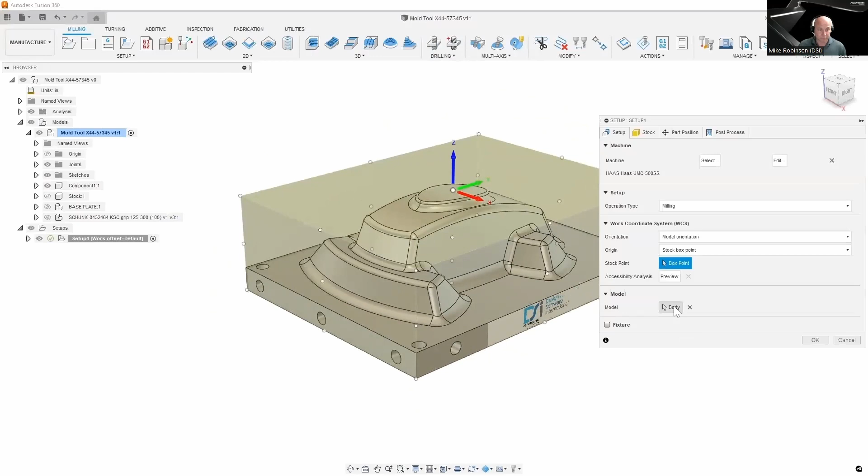Hopping into Fusion 360, we'll start off with this mold part. Essentially what we're going to do is hop from design to manufacture and look at how some of the features inside of the machining extension can help us with processing a part like this. First thing I'm going to do is go to setup. I'm going to start creating my setup. You can see that Fusion selected the body for me already.

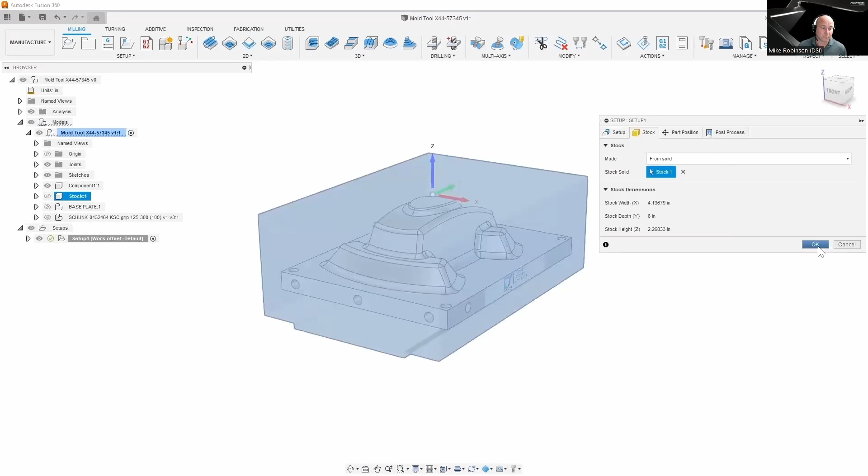I do have a machine selected here, UMC 500. And I'm going to add some of my fixtures here. And then I actually have a custom stock for this. So we'll set this as a solid and I'm going to grab my stock and that looks pretty good. And we're going to hit OK and our setup is created. So from there, I'm going to start machining this part. And the first thing I want to do is rough this out.

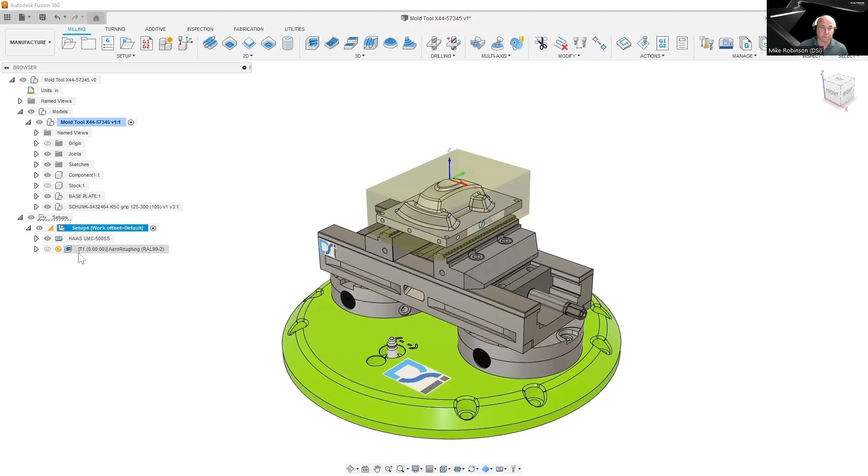Now this is something I do fairly often. So I'm going to right click on the setup here and say create from template. And I have this AeroRoughing template. It's going to drop that template in here and I can right click on this and just hit generate. That's going to go through and rough that out for me. And we can right click on this and simulate it because I'm imagining I'd probably want a little bit more definition. We can hit play on this.

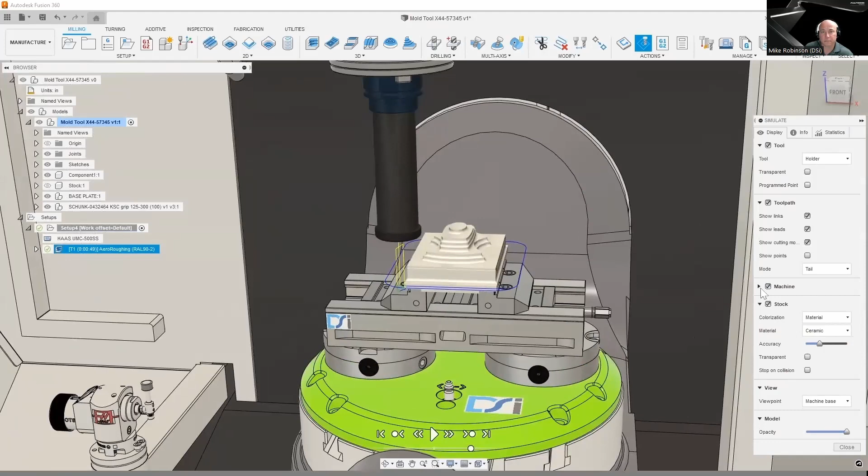We can see this going through. And that looks pretty good. We can turn this to transparent here to see there's a little bit extra material on there that I probably want to get with a rest machining operation. So I'm going to take this and duplicate it. And I'm going to go into the second version of the toolpath and change the tool.

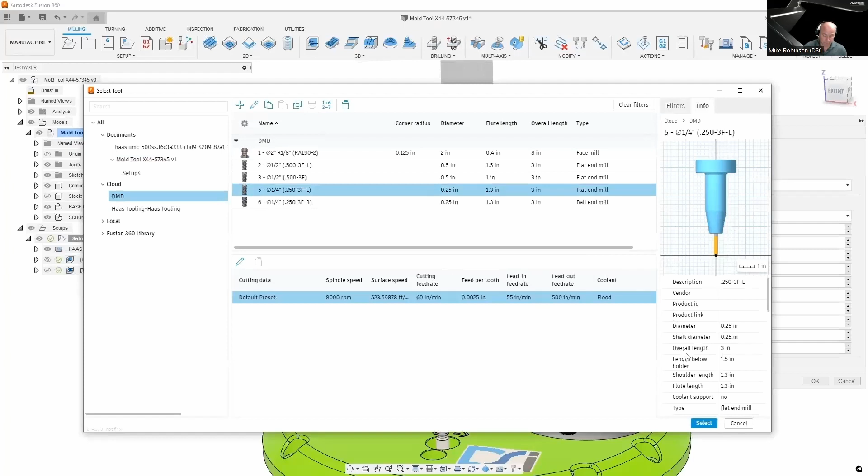I'm going to use this. We'll alter my step over here to like 0.1. And we'll go to geometry and I'm going to use from previous operations. And then because I want to have a fairly consistent tool pressure when I'm finishing this, we're going to increase this to 1 inch and we'll make this 0.1 for our step down there. And then I'm going to make this leave only 10 thousandths.

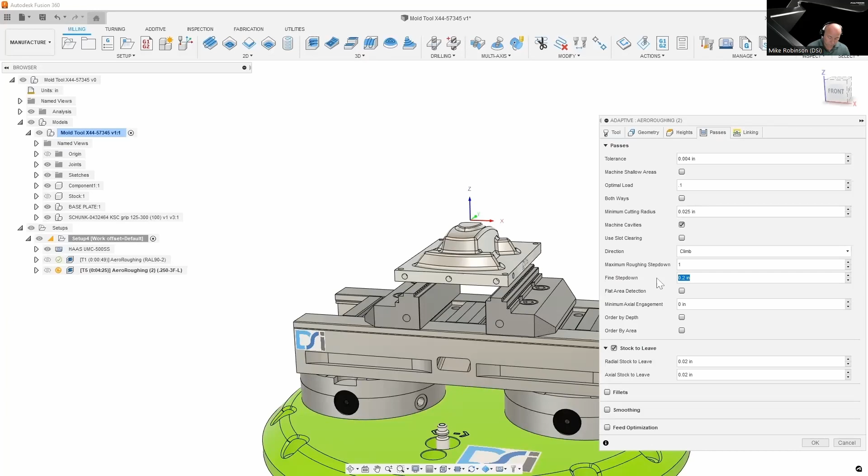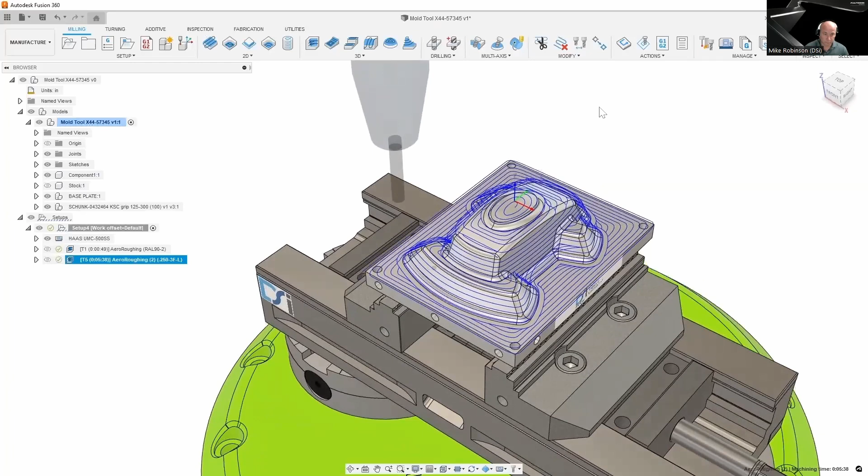One other thing with this smaller tool, I don't need to go all the way to the bottom of my model. So I'm going to limit that by just saying selection. We'll make this reference be 0. And I'm going to zoom in here and touch that face. Hit OK. That should give us a pretty good rest material finishing strategy, get all that extra material off of there. And if we want to see the model in process, we can turn this on right here and click on these individually and see how that's helping us with our model.

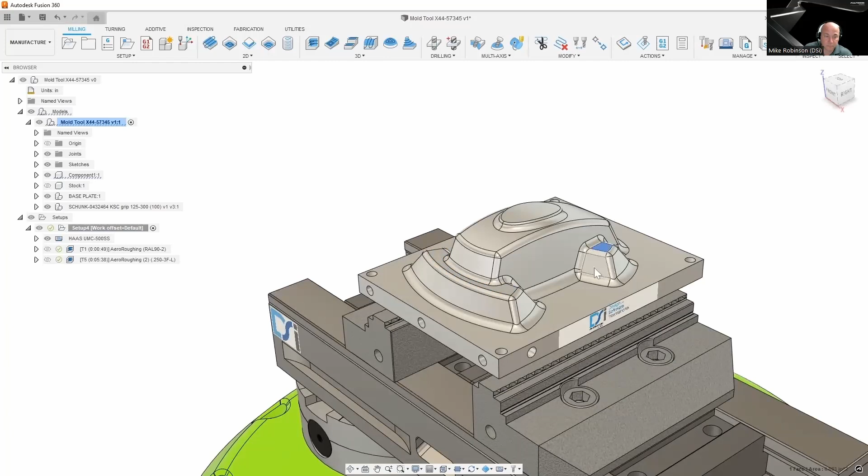So from there, I have the part mostly roughed out. Now what I would like to do is finish all the flat areas on this part. I notice there's some areas here and especially this part here. I'm going to go into 3D. We have this flat operation and I'm going to use the same 1/4 inch end mill just to get into these areas pretty tight. And we'll just hit OK. We're not going to make any selections there.

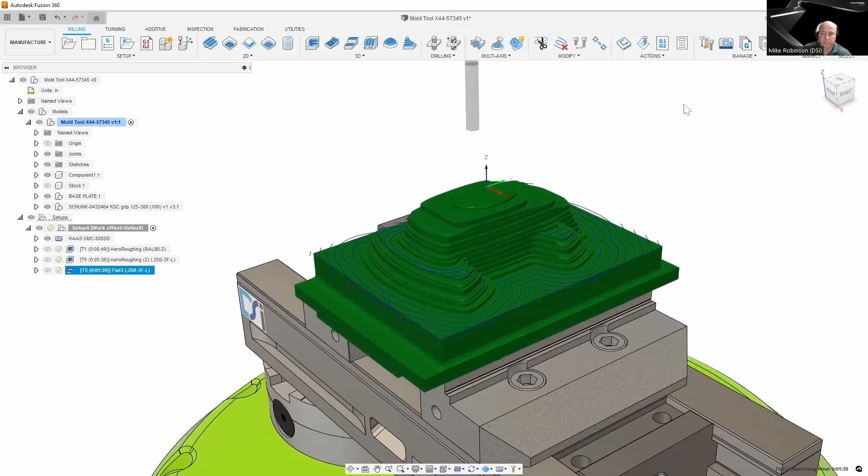We'll let that generate. That looks like it does a pretty good job of finishing those areas. Now here's where we get into, I would want to use the extension for this. So we could go through here and put a parallel toolpath on this, and we'll change the end mill here to a finishing end mill.

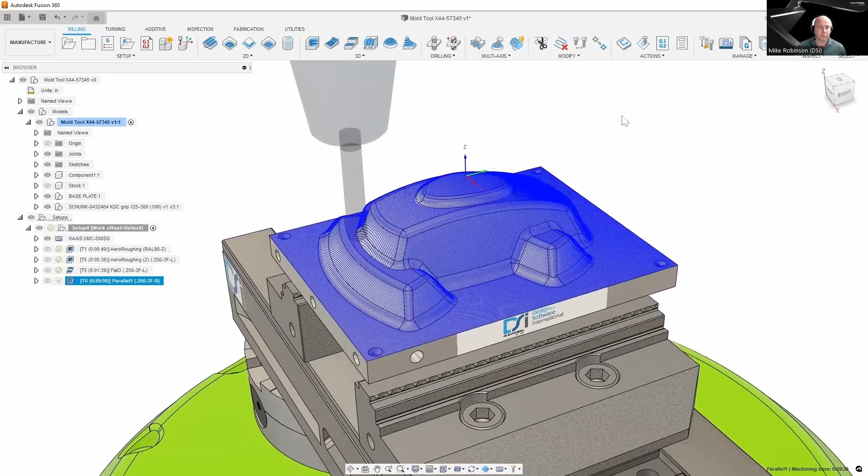And I'm just going to hit OK. This is kind of how I like to start out 3D toolpaths, just by selecting a tool and then making very minimal changes. I'm going to change this over here so we can see what it's doing. So I'm going to say 0.1, and then I'm going to rotate my path direction here 90 degrees just to accentuate this situation.

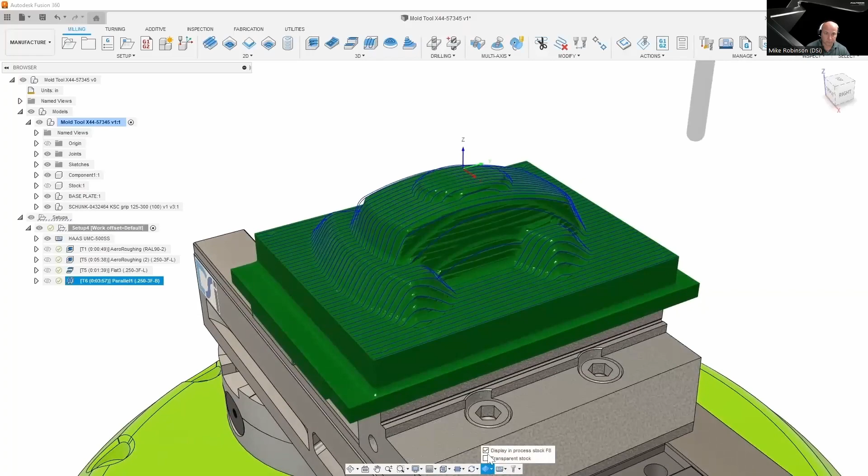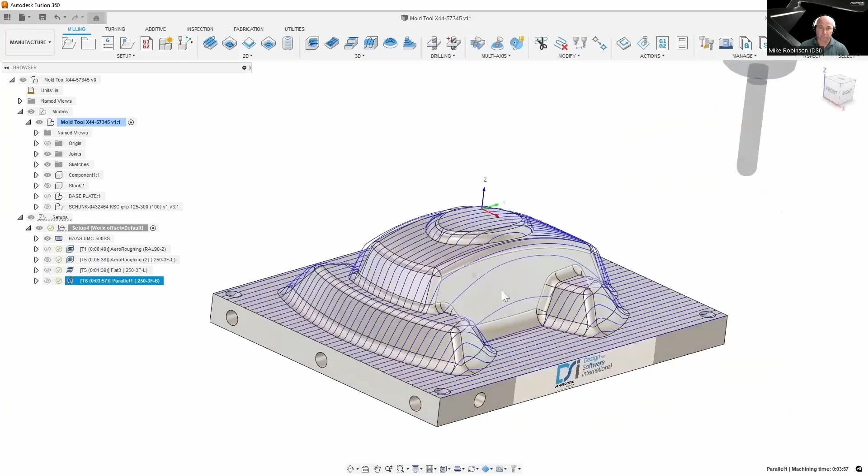So there we go. Let's turn off the stock so we can see this. So this 3D toolpath is doing what we want, right? This is a raster style toolpath, so it's just striping across the part here. If we look at it from the Z-axis normal from the top, we can see it's doing exactly what I've asked it to do. The issue here though is there's some pretty wide step overs based on where the toolpath is looking at, and that's just based on how this is calculated.

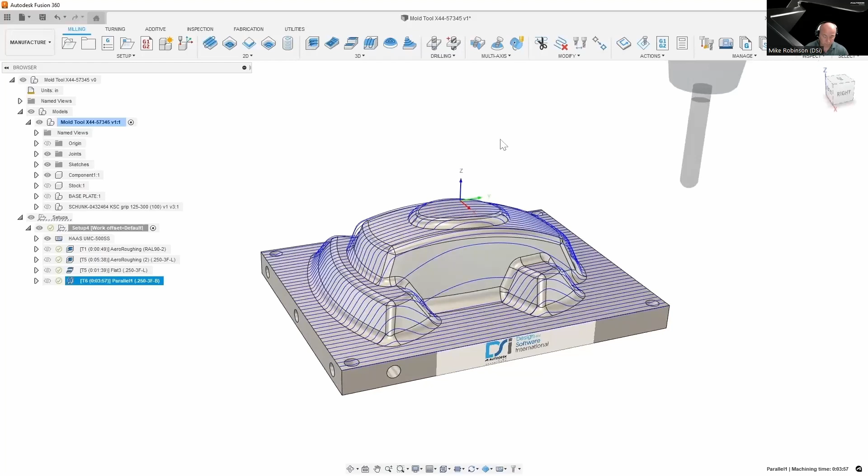And in here, what we'd probably want to do is segment these surfaces. We'd want to pick what surfaces we'd want for this toolpath, and then choose other toolpaths for different surfaces and whatnot. That might be pretty time consuming to go through this whole part utilizing that strategy, because there are quite a few different faces here. This toolpath is actually really good at areas of high slope, as long as they're in the cut direction, but areas of high slope that are opposite the cut direction here, we can see that the spacing is pretty wide.

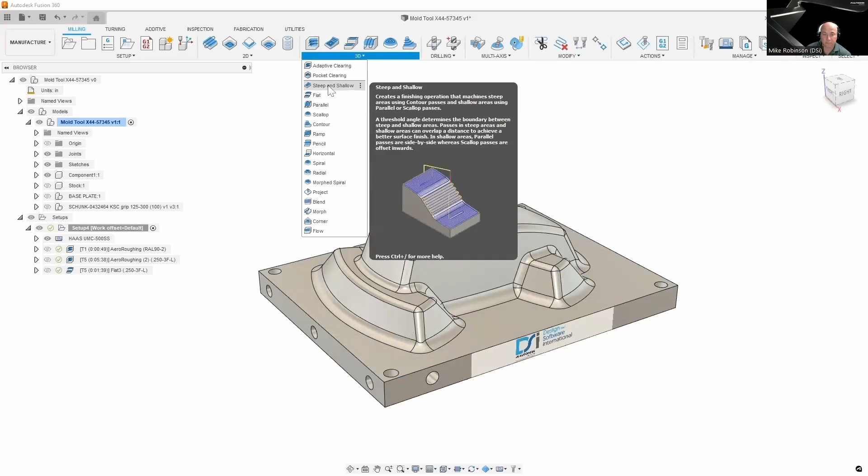So let's delete that toolpath. And I'm going to go into 3D here, and we're going to use steep and shallow. I'm going to again select that finishing end mill, and here I'll grab it from my document. And if we go to geometry here, it's just doing the silhouette of the model, which is the whole thing.

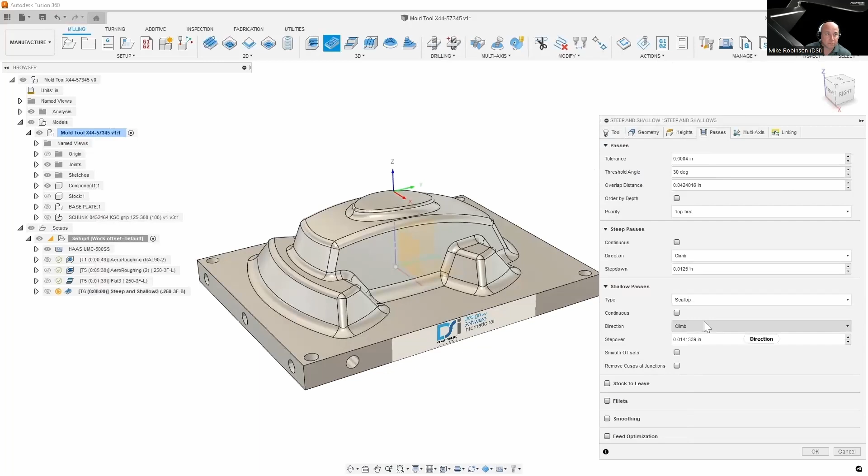And I want to avoid the flat areas, so I'm going to turn this checkbox on. Then we'll go over here to passes, and we'll change a couple settings. We can actually leave these scallop continuous. You can alter between the toolpath styles here. We might want to change this to parallel later. Let's just hit OK and see what we get.

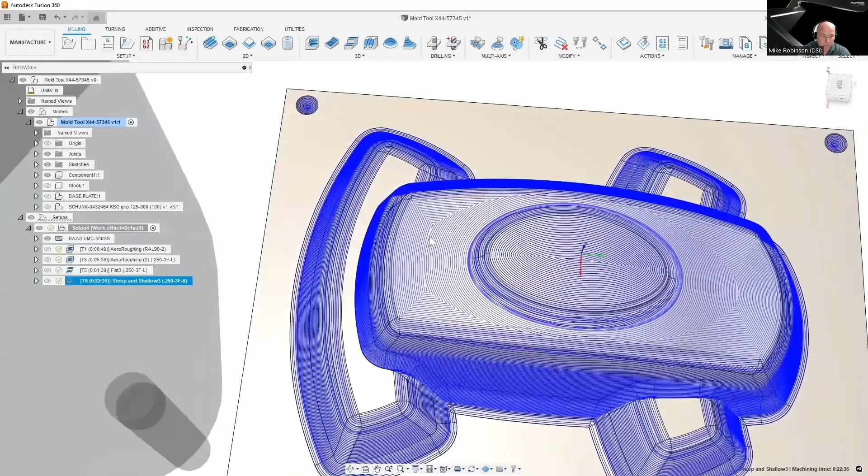And remember, we've already roughed this part out and finished all the flat areas on it. That looks pretty good. I'm not seeing anything that I don't really like, except the top here. I'm not a big fan of this style of toolpath kind of collapsing in there.

So let's double click on the icon. It'll bring us here to edit, and we can change this to a parallel. I'm going to make this go both ways. And then we can hit OK and see if we like this version of the toolpath.

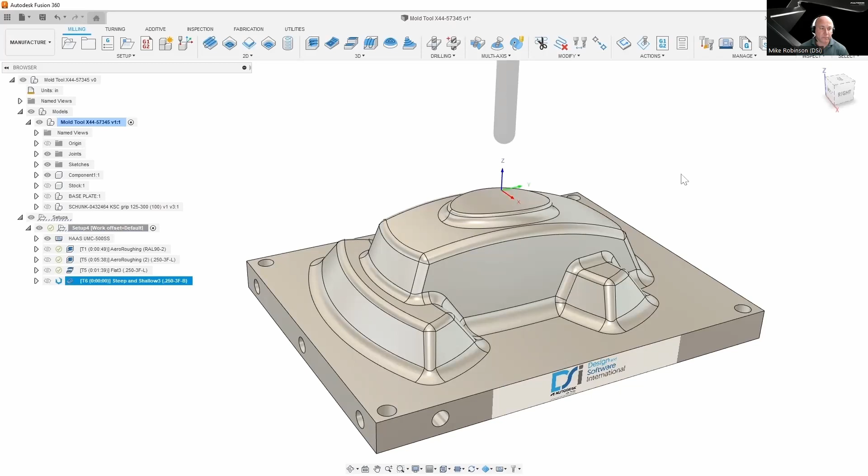While that's calculating, we can continue machining because it's going to calculate in the background. But it looks like it's done, and that looks much better, a little bit more what I was expecting. So we could simulate this as far as the process goes, or we could just take a look at this model as we have it so far.

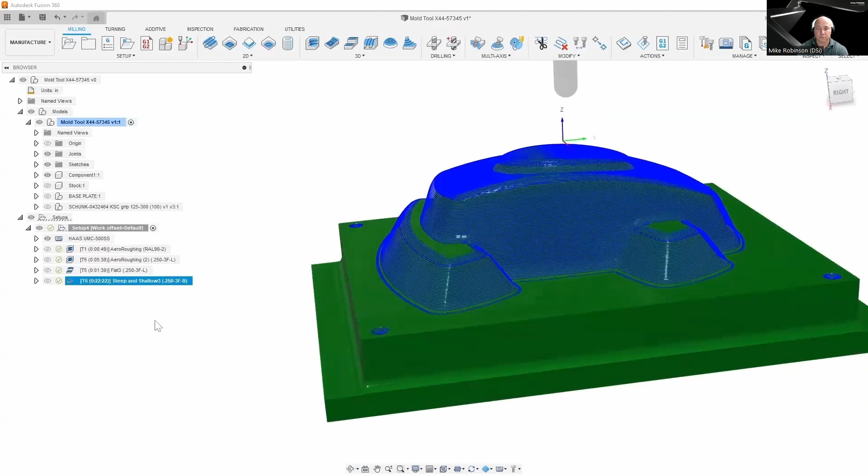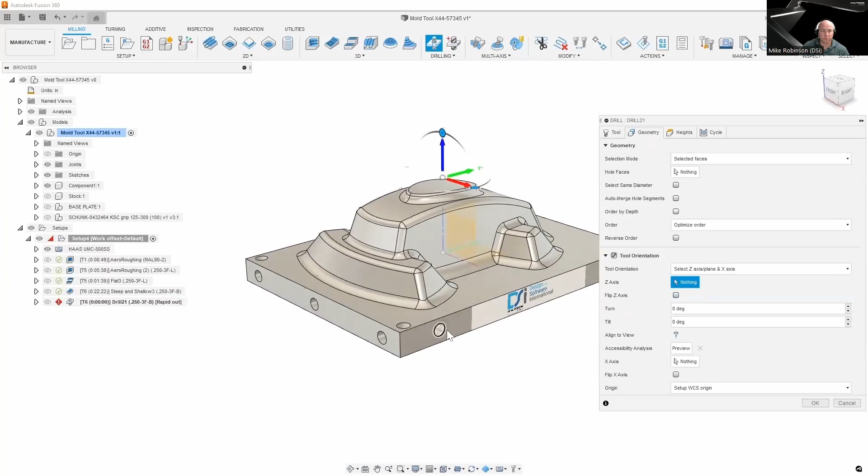That looks pretty good. What we're going to want to do now is process these holes. So we could go through here and make all these drilling operations just by hitting drill, by finding a drill, and then we'd have to come in here to each one of these and say tool orientation. We'd have to select our orientation. In this case, it would be this one. And we'd have to select our face here like that.

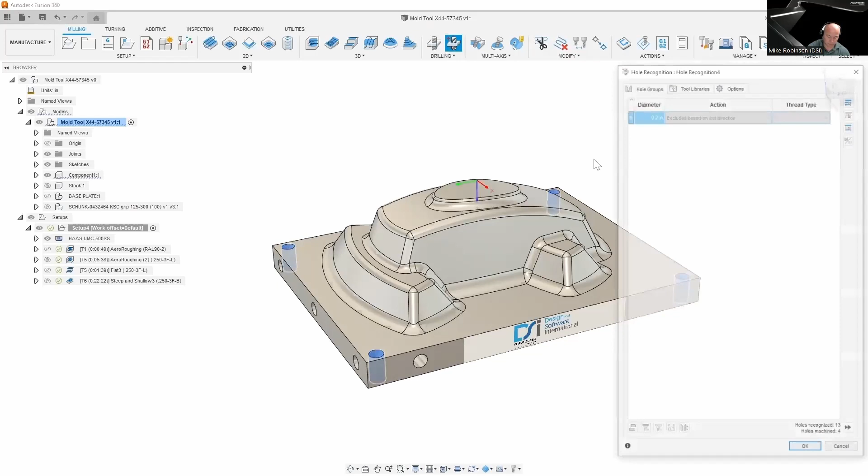Then we'd have to go and set our drilling cycle to what we wanted it to be. And then that would give us all these different orientations. So we'd have to do this for each face, not only the flat face, but all these angular faces. So in the extension, what we can do is grab this hole recognition and turn this on. Now this is going to quickly analyze the model. By default, you can see it's not gathering those other holes that are on here, and there's a reason for that. By default, it just works in 3-axis.

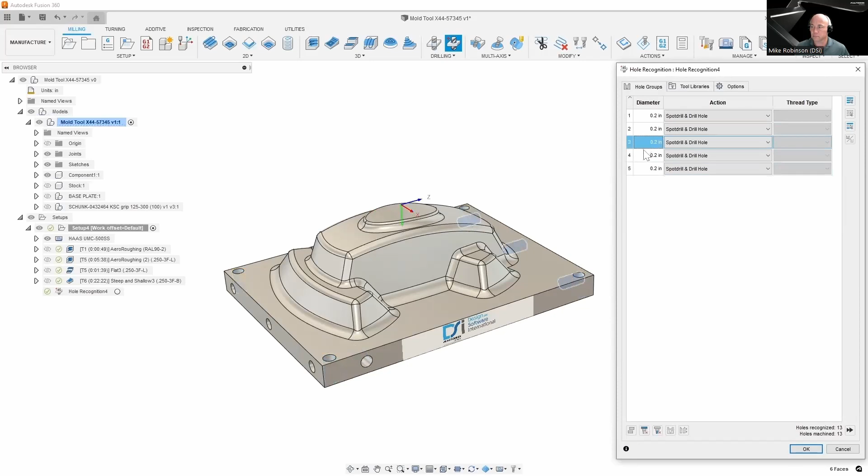So we'd have to go over to the options page and turn on multi-axis machining. When we check this, it's going to analyze the rest of the part and give us the other holes that are on here. I can see a few other holes are on here.

Now, one thing I'm trying to pay attention to is the Z-axis for each direction of these holes. This one would be okay, this one looks okay, this one also looks okay, and that one is the right orientation too.

But this one here, I wouldn't want to drill these holes from the back side, because we're not flipping the part over and working on the back at this point in time. So what I'm going to do is grab this segment, this selection of holes. Down here there are a couple things where we can split out this group, and we could do them each individually if they had to be different items.

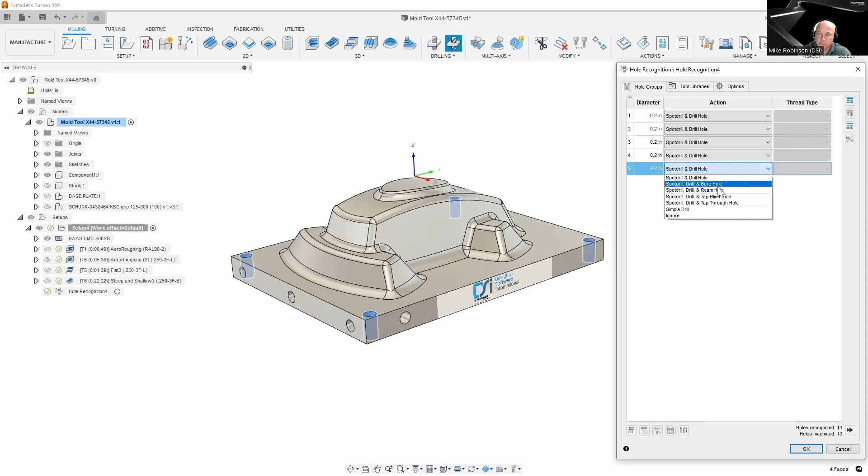But what I'm going to do here is use flip hole direction. So when I flip that hole direction, that gives me this orientation to machine those holes. And then we can choose what these are — maybe some of these need to be reamed or tapped. We can choose those options from there.

Now I'm just going to hit OK. So instead of doing each one individually, we can see that this went through and processed all of those holes directionally, and made us not only the spot drill but all the drills for that, because that is what I selected. That looks pretty good from there.

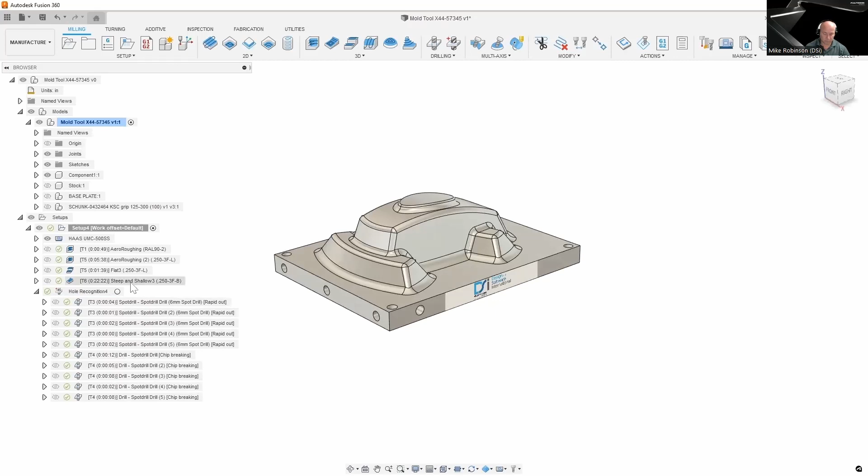Now, one thing — if we take a look at our steep and shallow here and turn off this model, this looks pretty good, but I forgot to look at this before, and I do see there's some 3D machining going on in these holes. Obviously that's undesirable, and I wouldn't want that to happen.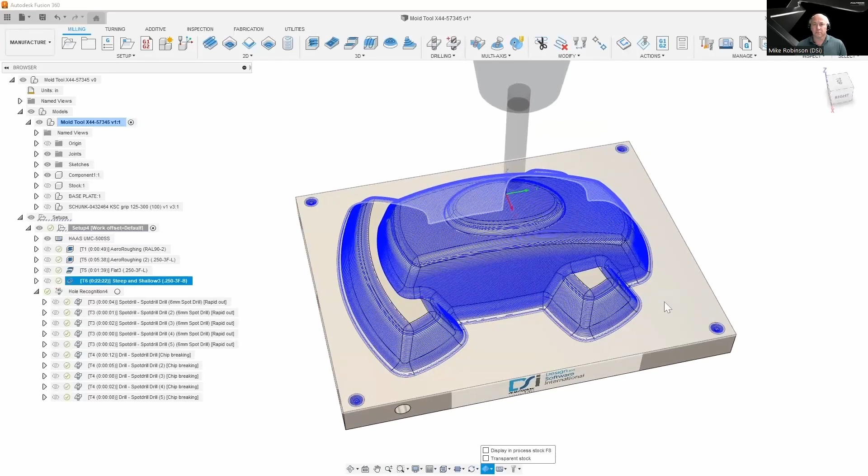So there are a few different ways we could adjust this, by making some sort of boundary or whatnot, but I'm going to show you two ways here.

So I'm just going to look at the top of the model with the toolpath selected. I'm going to go over to Modify and go to Delete Passes. Now with delete passes we can do a couple things — I can just do a circular or box selection here, select that region, hit OK, and it's going to get rid of that region.

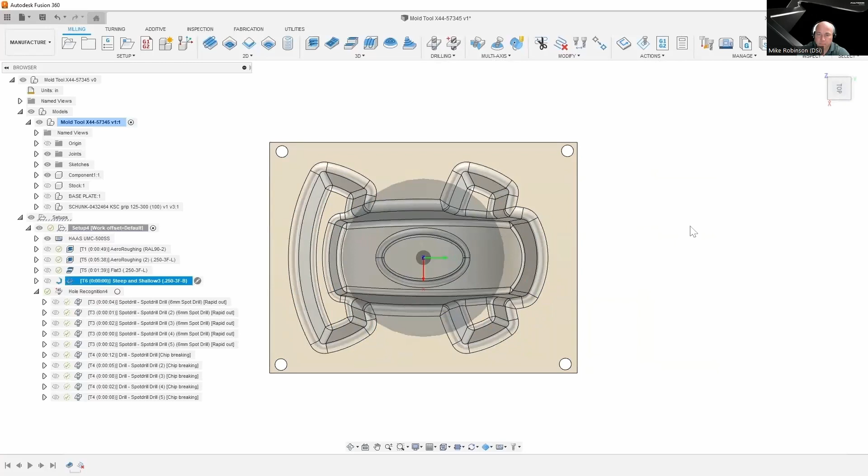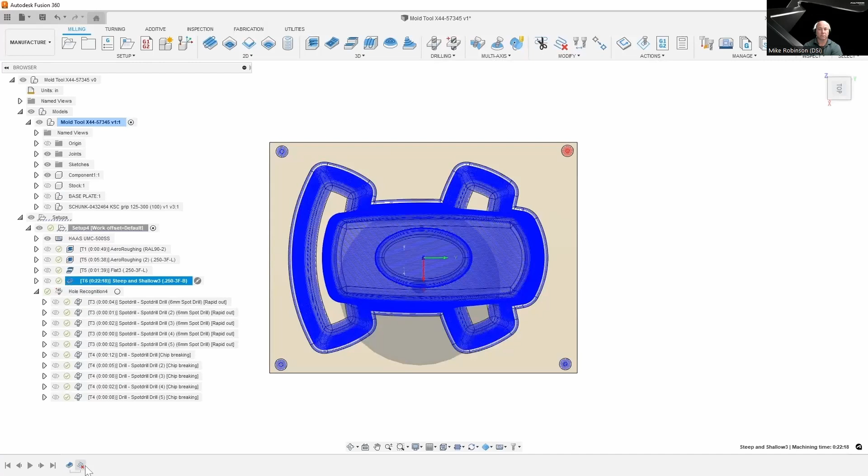So I could repeat that for all the other regions. Once we make a modification, it will display a little pencil icon showing we've made some sort of modification. It will also give us this timeline down in the lower left. When I hover on the delete passes, you can see shown in red the segments that I deleted. So let's right click on this and say delete.

I'm going to do a little bit different of a process for trimming this up. So I'll go to Modify, and instead of Delete Passes, where I'm picking actual passes or segments, I'm going to go to Trim. With trim here, you can see I have a couple options — trim type, polygon.

So I will probably just draw a polygon. We could also trim this to a plane, because some of my toolpaths also live on this plane. We probably wouldn't want to use a selection. We could also use a boundary.

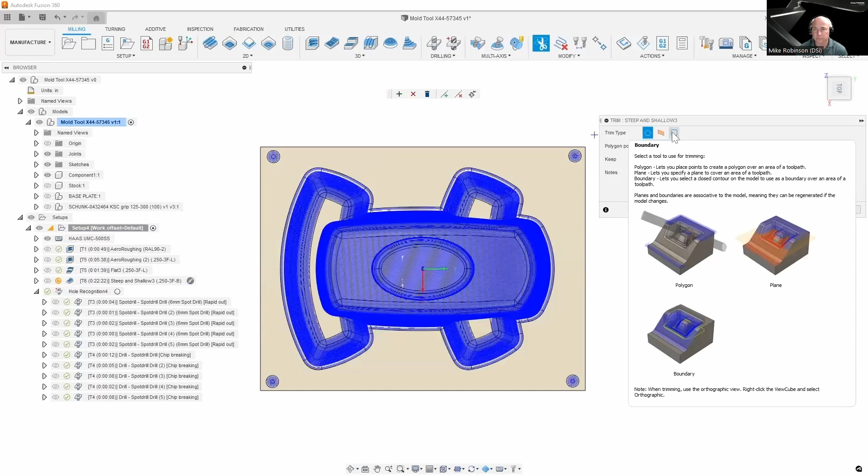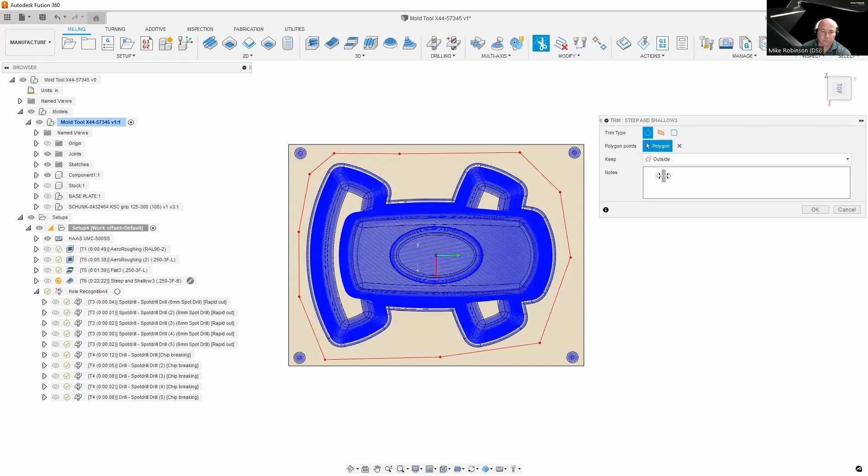So I could select boundary and grab something like this outside chain here, and then offset it by a certain amount. But what I'm going to do is actually be picky and just draw my own boundary here. I'm making a couple quick selections on the screen, and it looks like I've encompassed everything I'd want there. So I hit the plus sign, since I want to keep the inside of this, and I'm just going to hit OK.

And then that's going to regenerate that toolpath. So no matter what changes I make to this — if I make the step over bigger, wider, anything like that — it's always going to replay this edit. I can show you that here real quick.

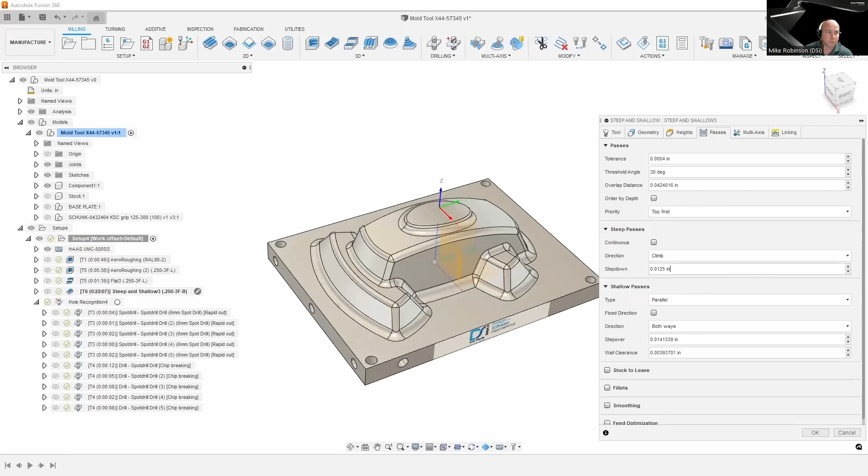Let's go into Passes here, and we'll say that I want my step down to be like 100 thousandths, and my step over to also be 100 thousandths. We'll see that this regenerates, and it captures those edits that we made.

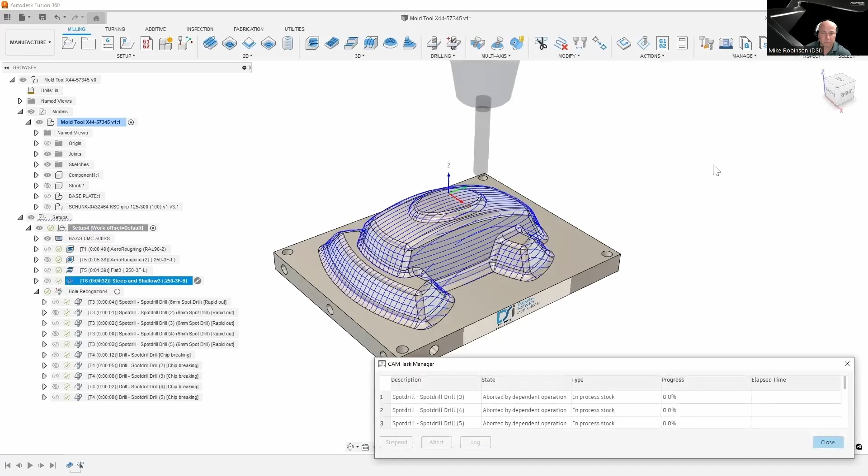We'll give that a second to generate. One other thing you can check is Task Manager, which shows us everything that's running. Say remove completed, and it's preparing some of the stock on the side. This is a good way to see what our toolpaths are doing as they're generating.

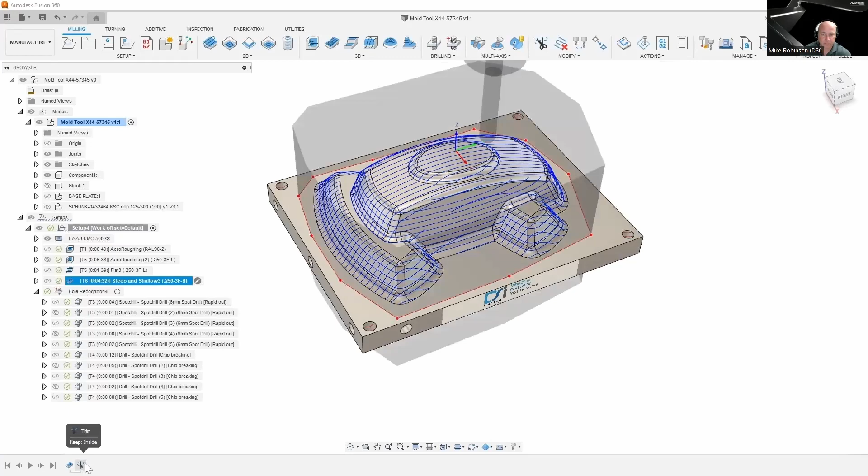It looks like it's done. If we click on this down here in red, there's that box shown where we made the toolpath limit, and we can see red areas in those holes where a toolpath would have been produced, but was later trimmed off by the boundary we selected. That looks pretty good.

I'm going to hit Control Z to undo that. We can see this goes back to this version.

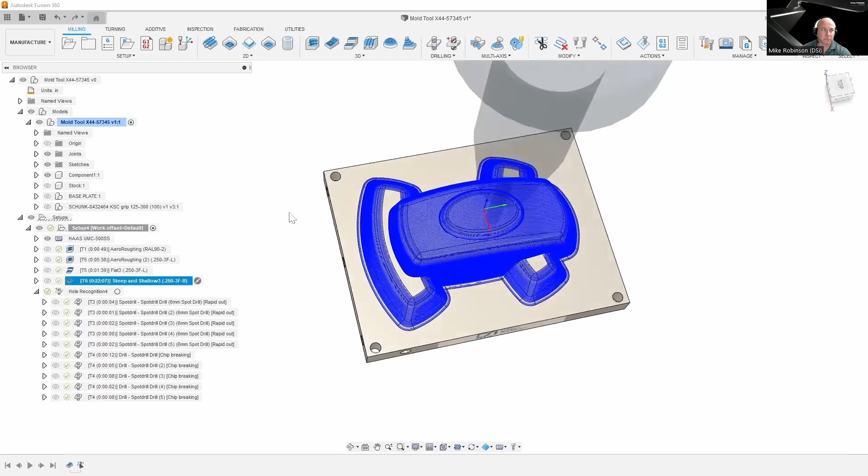We can right click on the setup here and hit simulate. Because I have this machine selected on my setup, we'll be able to see that. I don't see my fixtures though, so I turned those off while making some of the toolpaths just to make it look a little cleaner.

To activate the setup in the view, down here it says synchronize view and visibility. There's a sync view with active setup, which shows the view cube, and a sync visibility, which shows all the parts related to our setup. This is kind of like an auto levels - if you're coming from another system like Mastercam where you put things on different levels and turn them on and off to see visibility, this does it automatically by activating these setups.

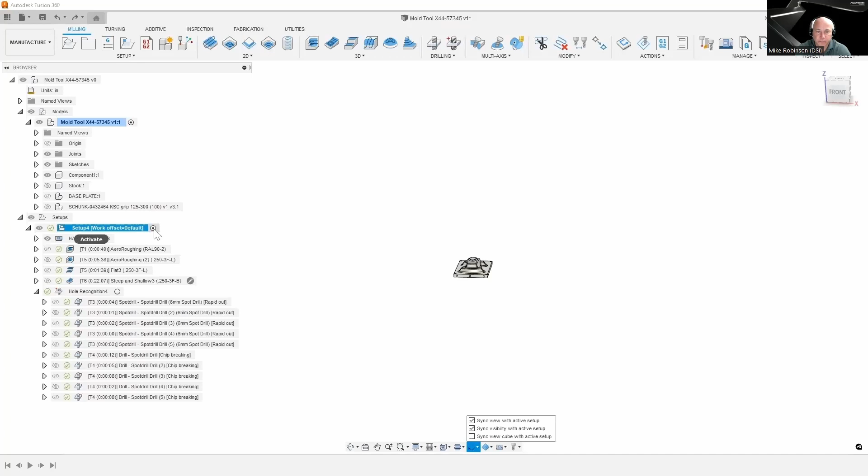You would activate that here by hitting this little black dot. So you can see when I click on this, it's actually going to show me the rest of my setup here - my fixtures, my vise, and everything I have in there.

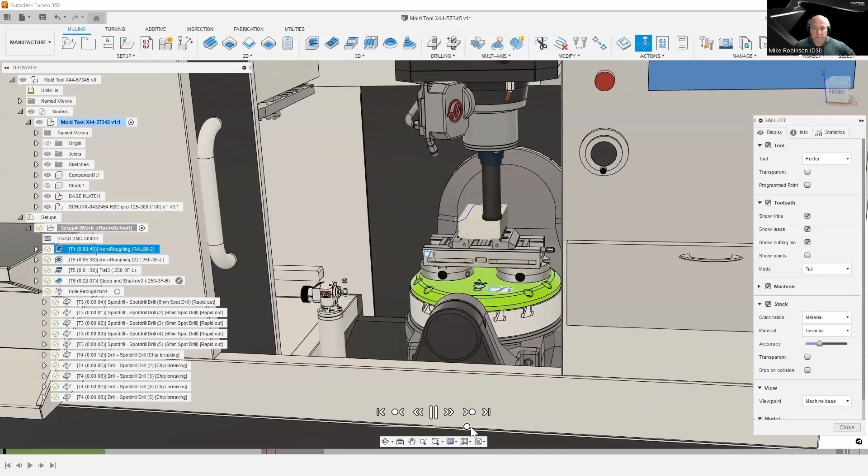Now when I right click on this and hit simulate, we'll see everything shown in the machine as it would be. So I can turn this transparency off, and we can hit play. You can see this is going to go through here and rough this out.

This is kind of my rest roughing. This is my flat machining. And this is going through the 3D processing on this part, with that steep and shallow. We can see we're doing a pretty good job of getting the coverage there on the top.

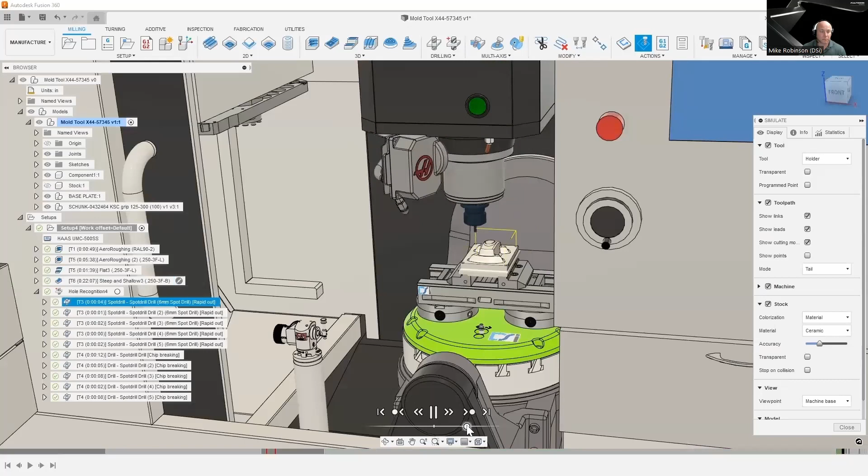Almost done with that. Then we're going to go into the drilling here. And that looks pretty good.

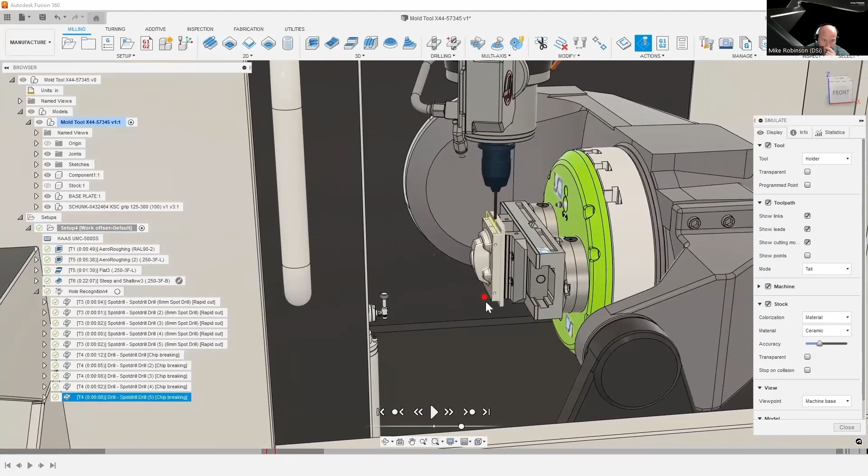So if I machine this part and I wanted to check it, there's a couple things we could do before we pull it off the machine. If it does have to be remachined, I would rather do this in the machine and at least get some sort of verification before I take it off and bring it over to a CMM.

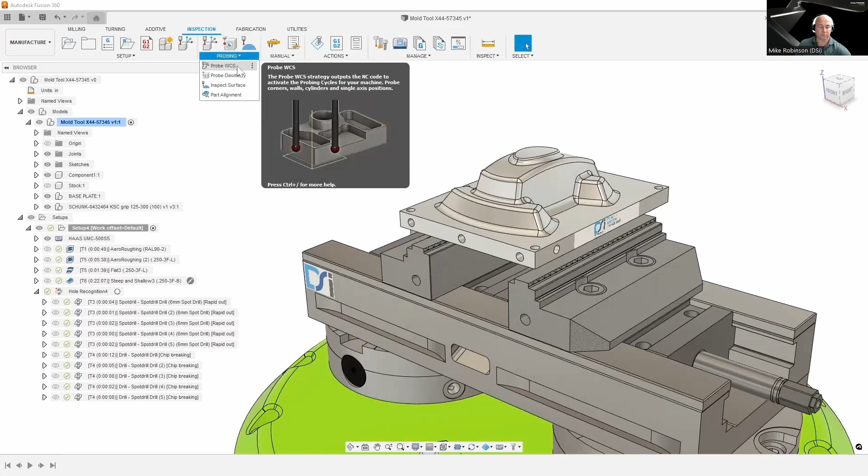Let's go over to the inspection tab here, and I'm going to go to probing. There's a couple things on here - we can set the work coordinate system, but that's not something we need right now. Probe geometry would be for geometric features, so if I wanted to measure a height or distance or the size of this block, we could do that. But there's inspect surface here.

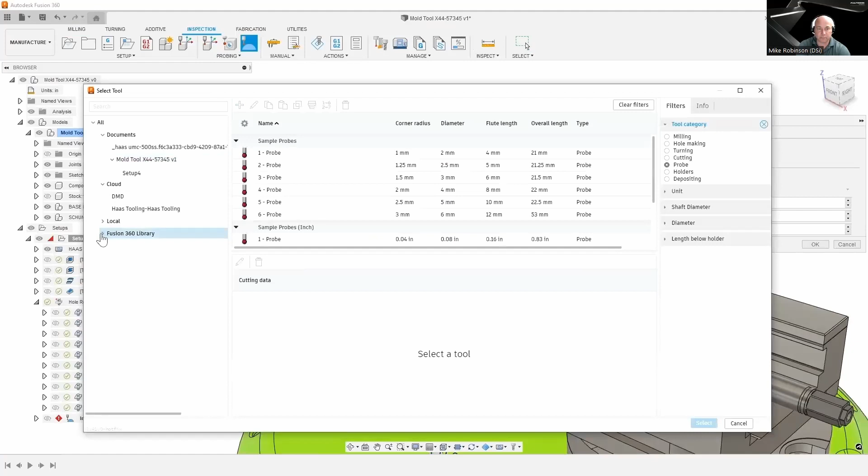A couple things we can do with this - I'm going to hit inspect surface, and we'll choose a tool. If we don't have a tool in our own library, we can choose the Fusion 360 library - a 6mm probe is what's standard on a Haas machine. Hit select, I'll put in a feed rate of 200, and then we'll go to geometry.

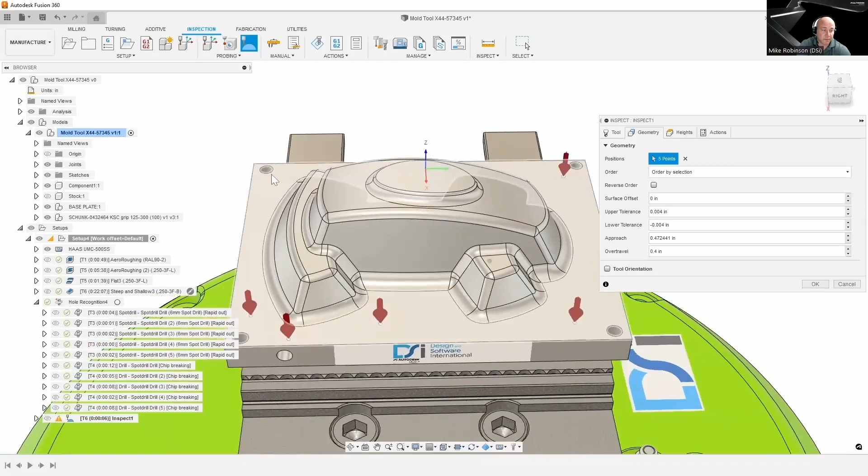Here we can actually touch some of these surfaces, whether they're flat surfaces, we'd just be getting a reference. We can pick on the model here, and this gives us a vector-oriented touch point on the part. So we can grab these for reference and see how much material is still remaining on these.

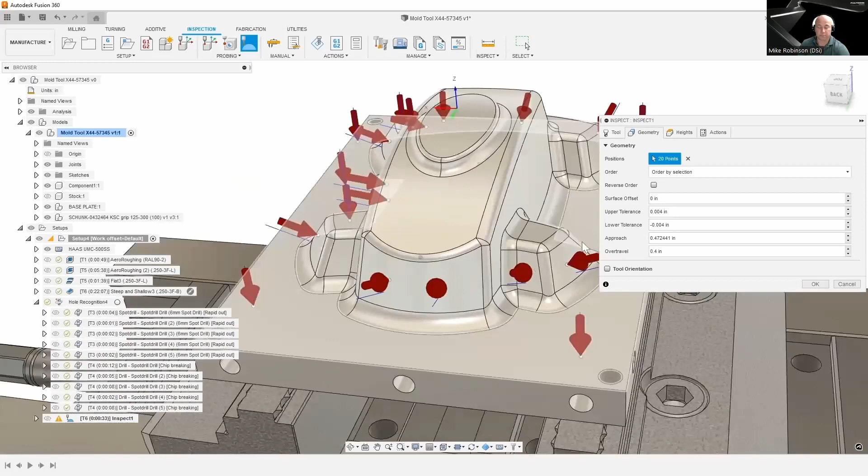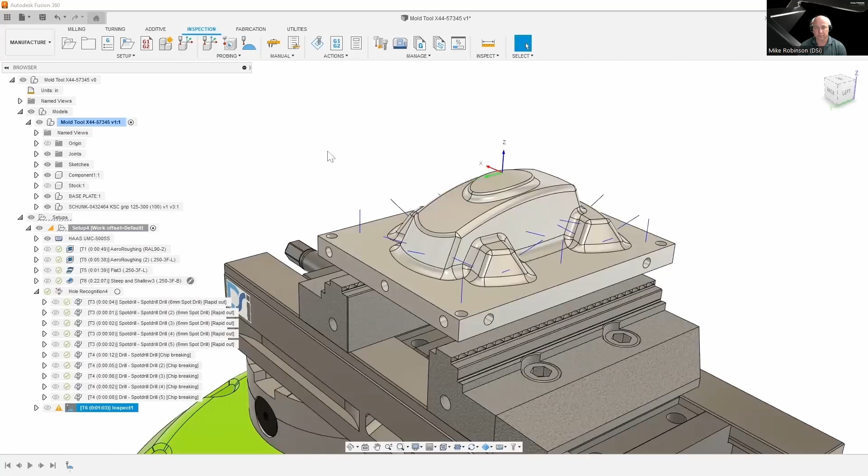This would give us a good idea of if we need to adjust something on the machine or recut something. We can look at my heights page here, probably lift this up a little bit. We'll hit OK. And then this would go through here, and while we're running this, we're not going to be able to show with the machine, but while we're running this, it's going to let us come through and inspect all these points on the part.

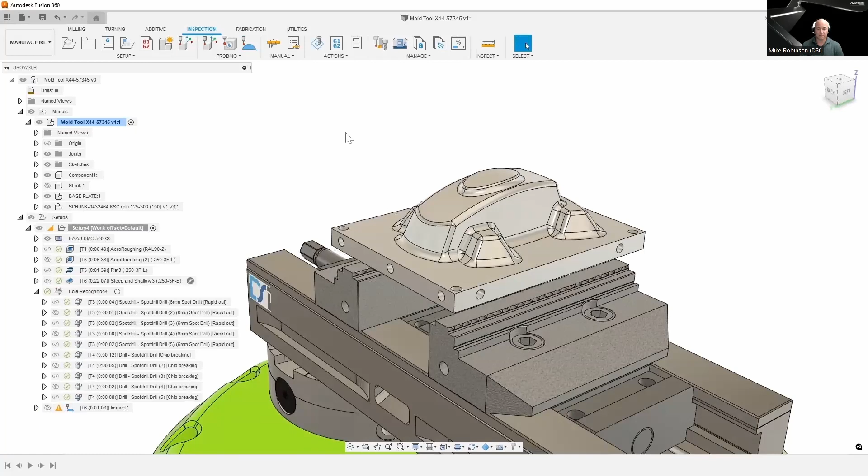And then it's going to write a text file that we can read back into Fusion 360 and see those deviations. And from there, what we could do is make a decision. Is this part good to take off? Do we need to remachine this, or are there some areas that still have excess material on there? And we can make a decision.

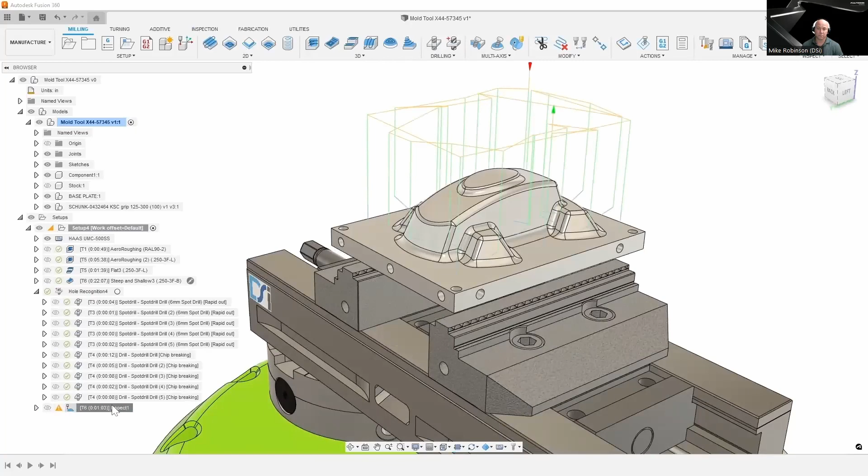The other thing is, if maybe I did pull this part off and I wanted to put it back on the machine, maybe I brought it over to the CMM, did some scanning, looked at it, measured some features on there, and I'm like, you know what? I figured out this needs to be remachined. We could use this same inspection cycle, and I'll turn on some of these leads and links so it looks a little bit more relevant, but we can turn on this inspection cycle, put the part back in there, and measure all these points, and then do a best fit for our program.

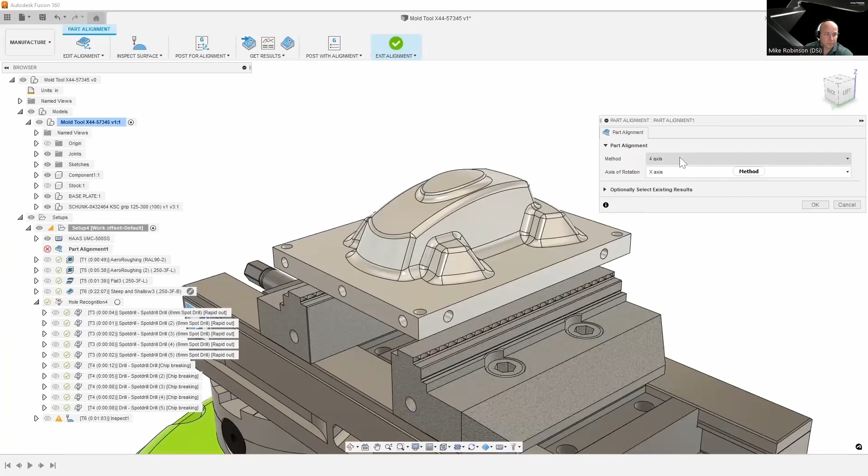So if we needed to redo this steep and shallow, we can come over here to probing and say part alignment, and then this will let us do a bunch of things here, whether we want to just move it in 3-axis, or we want to move it in 4-axis, like maybe we want to rotate it or adjust it if it was on a 4th axis. And in this case, it's on a 5-axis machine, so we can really move it in any position.

So what this will do is it'll actually take where the part's sitting in the machine, and it's going to repost your program with the part alignment, so that no matter how it's sitting in there, if I just kind of put it back on there and roughly probed it in, it's going to give us a good origin and a good position for the part, for the component.

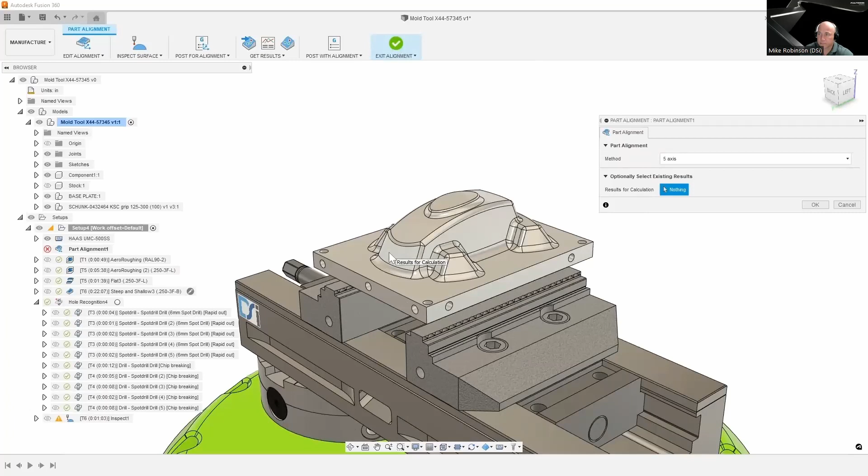From there, I'm going to just remove that real quick, and then what we'd want to do is come over here and right click on our setup. We'd say post process. This is going to make an NC program, and here what I want to do is use a post. So this has a machine simulation post. This looks to be a little bit older of a machine that I had selected.

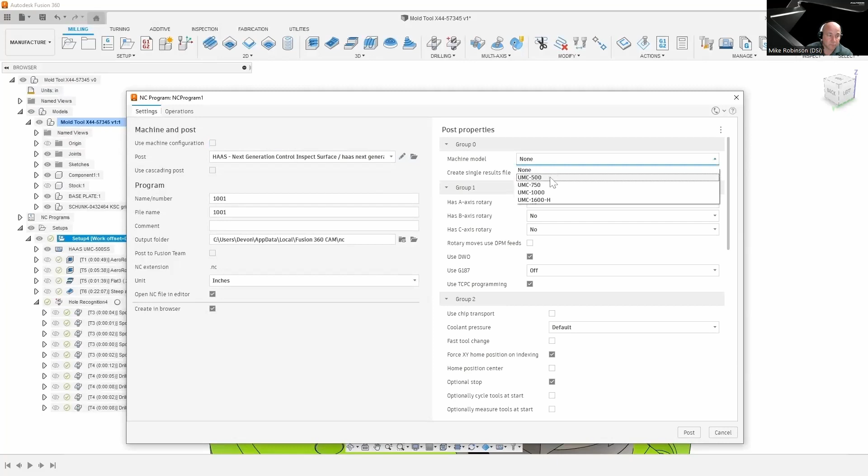Go to the cloud library here, grab an inspect surface post there. And then I'm going to turn this machine configuration off just for the way that I'm posting it. And we can right click on here and move to the machine model. We'll hit UMC 500, and we'll hit post. That's going to give us our code for the machine, and then we can go run that.